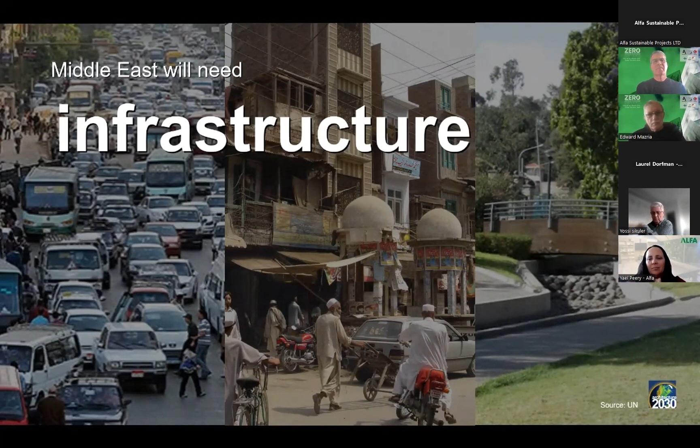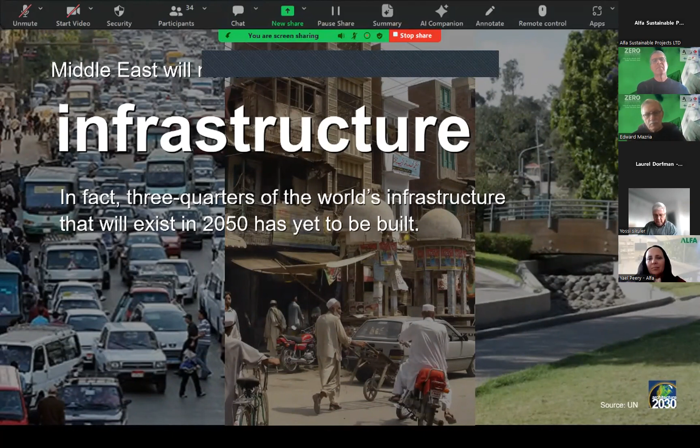The Middle East will need 60 million housing units by 2040. It will need 540,000 hospital beds, 73,000 schools, and it will need the infrastructure that comes with all that building. In fact, 3/4 of the world's infrastructure that will exist in 2050 has yet to be built. We know that the built environment is responsible for over 42% of global CO2 emissions. And just 4 construction materials, cement, iron, steel, and aluminum, are responsible for 15% of total global emissions.

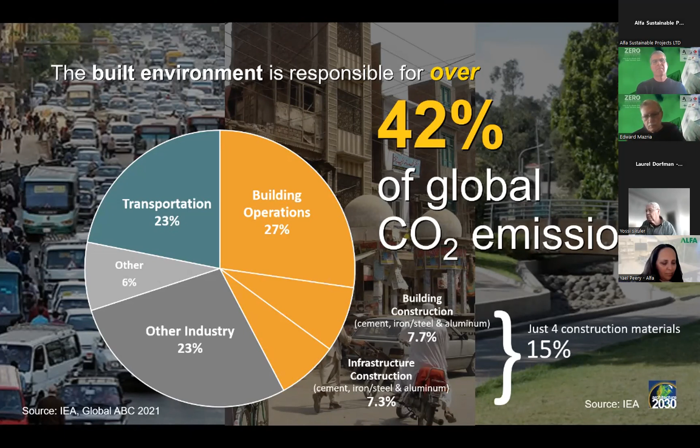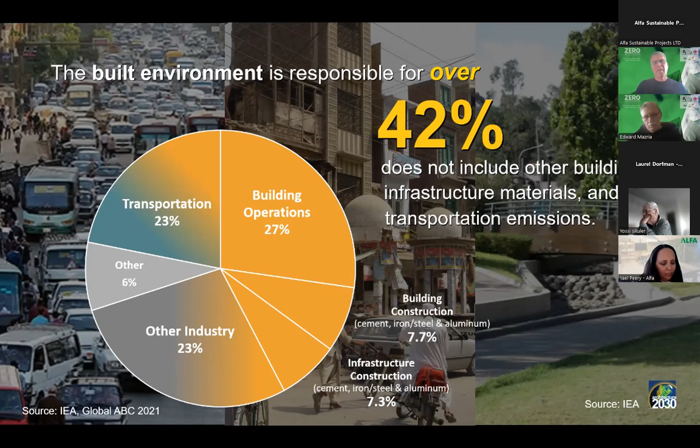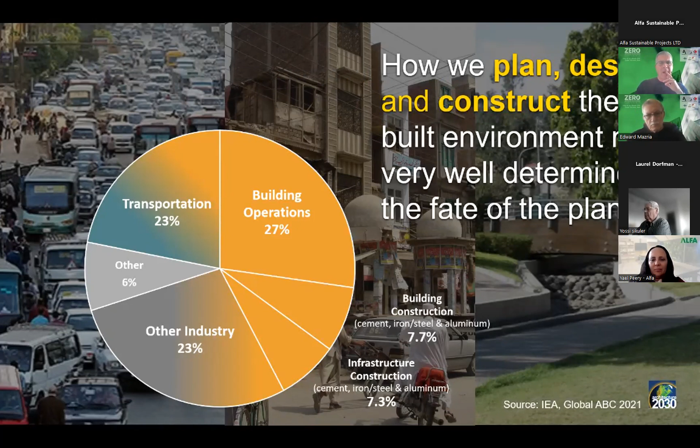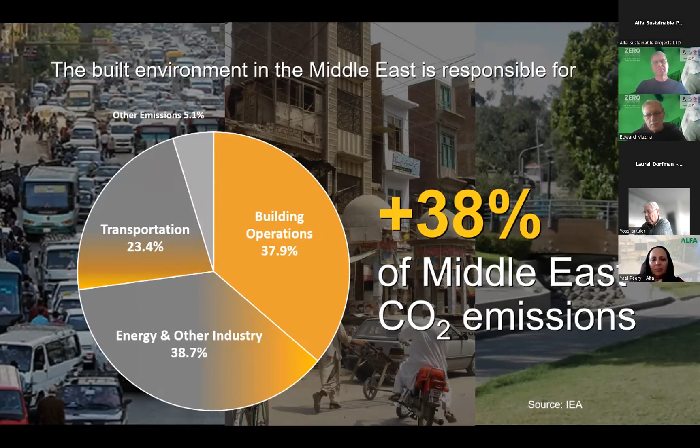And that doesn't include all the other building materials, interior materials, HVAC, infrastructure materials, and the transportation emissions due to planning strategies. When you add all that up, the built environment's responsible for over 50% of total global emissions. So how we plan, design, and construct the built environment may very well determine the fate of the planet. The built environment in the Middle East is responsible for more than 38% of its CO2 emissions. You can see that building operations, just building operations, is about 38%. And then you have building the buildings, all the construction, infrastructure, and transportation emissions due to poor planning.

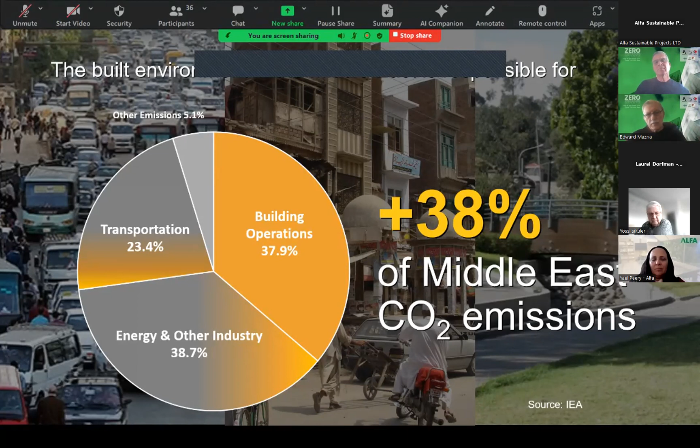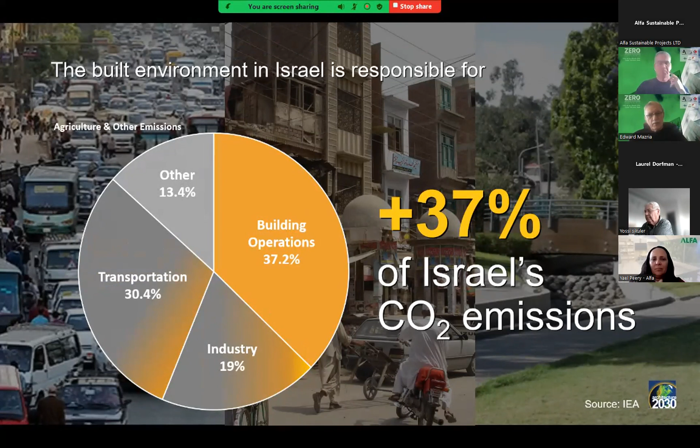In Israel, you see about the same. Building operations at 37%, and then you have a portion of industry and transportation.

In 2015, at COP21 in Paris, the world came together and agreed to work to keep global warming well under 2 degrees C, preferably at 1.5 degrees C. In 2021, at COP26 in Glasgow, we issued the 1.5 degrees C communique.

We called for 50 to 65% building sector CO2 reduction by 2030, and for a good probability of meeting the 1.5 degrees C target, phasing out emissions by 2040. For just a 50-50 probability, we would need to reach zero emissions no later than 2050. To date, 74 major international firms and 29 organizations have signed on to meet the targets of the communique.

Why do we keep hearing about 1.5 degrees C and 2 degrees C? Because the difference between 1.5 and 2 degrees C are 2 very different futures. At 2 degrees C, a half a degree difference has a huge impact. At 2 degrees C, 1.7 billion more people will be exposed to severe heat waves every 5 years.

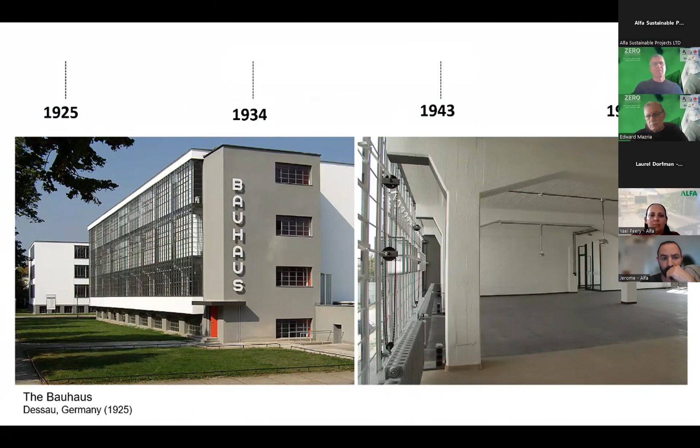So what was going on at that time? The Model T truck was introduced in 1925. Radiovision was invented. There was no television yet. And the first transatlantic call was made in 1927. All of this pretty much primitive by today's standards.

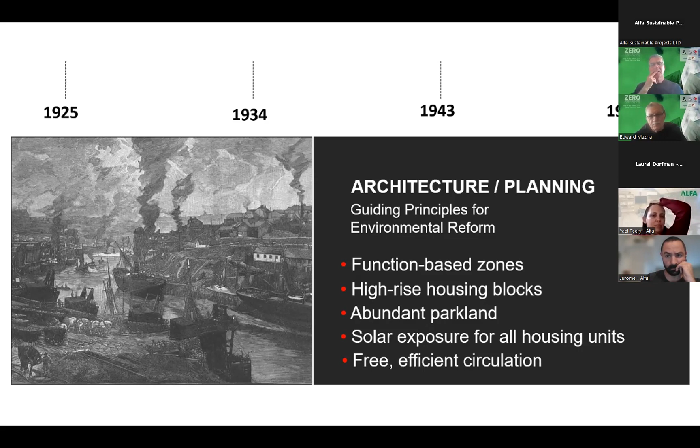In 1928, the International Congress of Modern Architecture was founded, and the first meeting was held by prominent architects and planners in Switzerland. Physical conditions in European cities were so bad at the time that the attendees established a new set of design and planning principles. They called for function-based zones, separate the housing from the polluted industrial areas. They called for high-rise housing blocks with ample sunlight into housing units, parks, and efficient vehicular circulation.

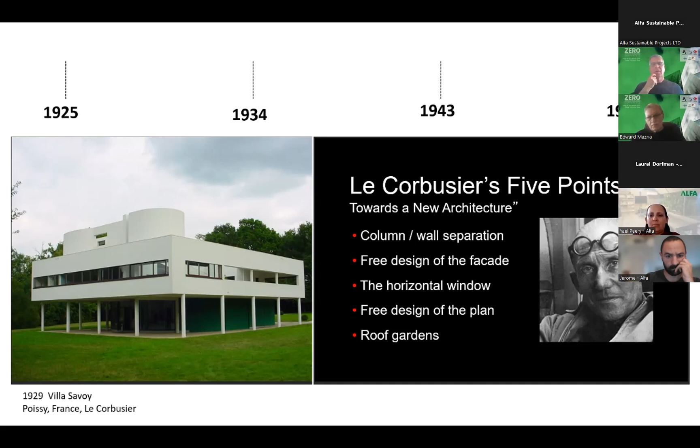Le Corbusier at the time presented the 5 points toward a new architecture. He called for column wall separation, free the design of the facade and plan, horizontal windows for expansive views, and roof gardens atop buildings. By 1932, modernism had become a style and went international. One could build the same building anywhere in the world and condition it with fossil fuels.

For example, in the 30s and 40s, over 4,000 Bauhaus and international style buildings were built in Tel Aviv alone, much less the rest of the world. In 1935, at that same time, we had the first commercial airport opened. In 1949, Philip Johnson designed his all-glass, single-pane glass house in New Canaan, Connecticut, a cold climate with very hot summers. Of course, you can condition any space with inexpensive fossil fuels.

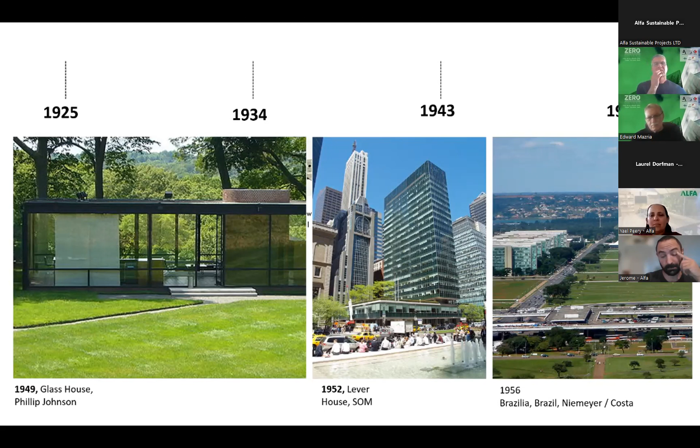In 1952, the beautiful Lever House, glass curtain wall, high-rise building opened. And in 1956, we had Brasilia, the first new town based on the modern planning principles. So, how long did it take to change the world, to go from the Bauhaus to the Lever House? It took just 27 years.

And we did all this with these design tools, a T-square and triangle. We had an ink pen, but you had to dip it in an inkwell. And when you drew a line with a T-square or by the triangle, many times the ink would slip in under the T-square and triangle, and you have to scrape off the ink with a razor blade.

We couldn't design real curves, only maybe a semicircle, because we couldn't dimension it. We only had French curves at that time, and all the calculations were done with a slide rule. In fact, we didn't get the first drawing ink pen until 1960, a rapidograph, and the first laptop computer in 1991.

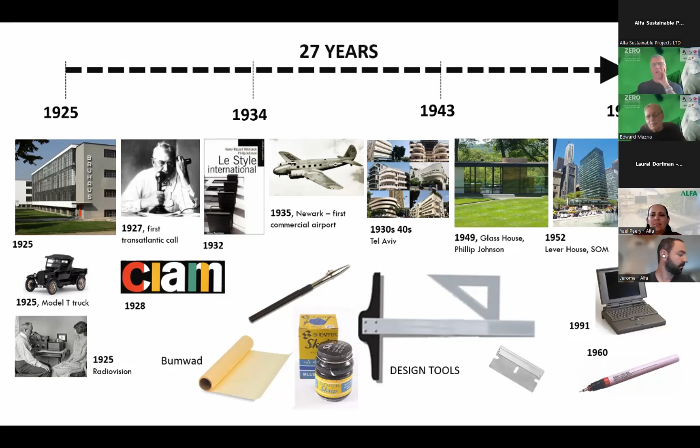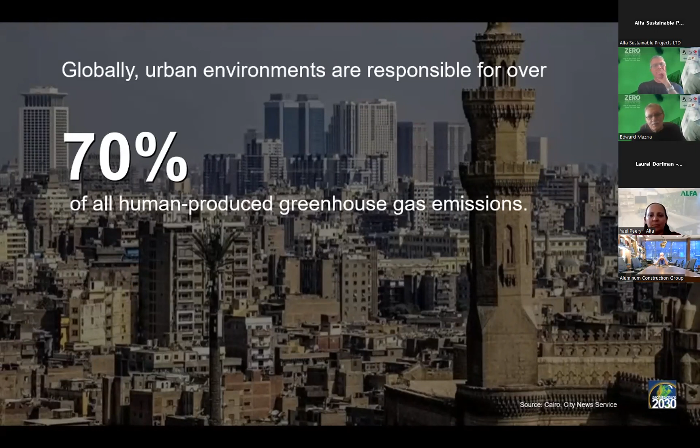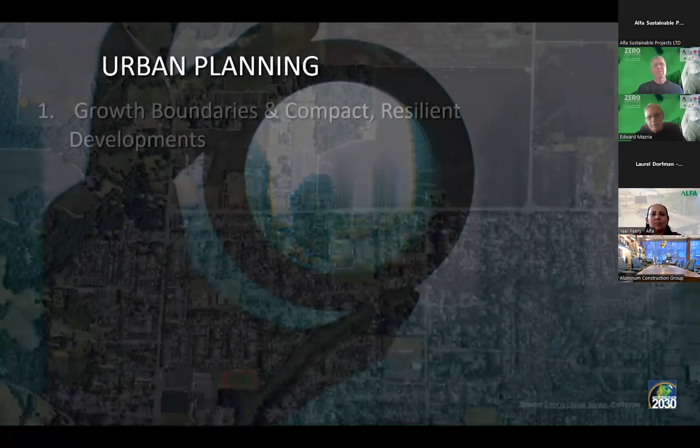Number 1, establish urban boundaries, plan compact and resilient developments that mitigate the impacts of climate change. 2, create and restore natural environments, urban forests, living shorelines, and protect farmland and historic sites, and also create urban parks.

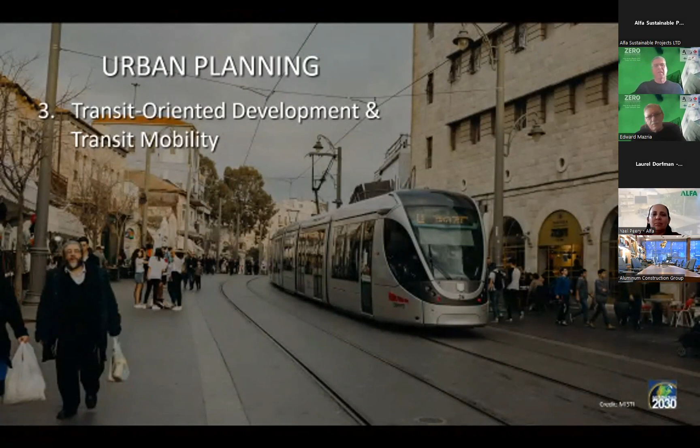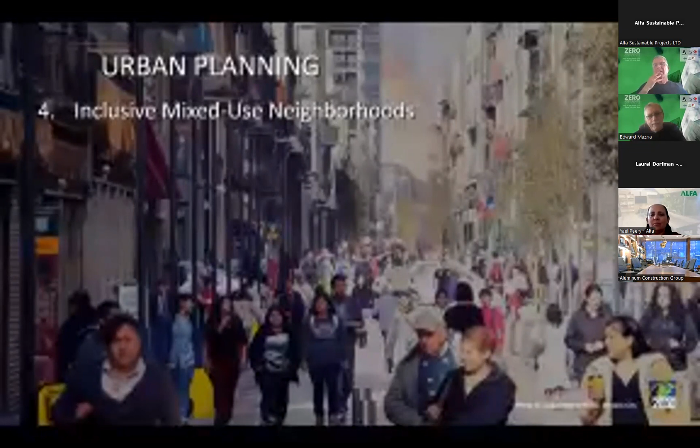3, plan transit-oriented developments that align with density and locate residential, commercial, and recreational areas near transit hubs. 4, create inclusive mixed-use neighborhoods that combine residences, businesses, workplaces, and civic services. And 5, plan for small blocks, human-scale streets, and walking and biking.

So let's review the 5 urban planning principles. Growth boundaries and compact, resilient developments. Natural environments, open lands and parks. Now, the 5 architecture, design, and construction principles.

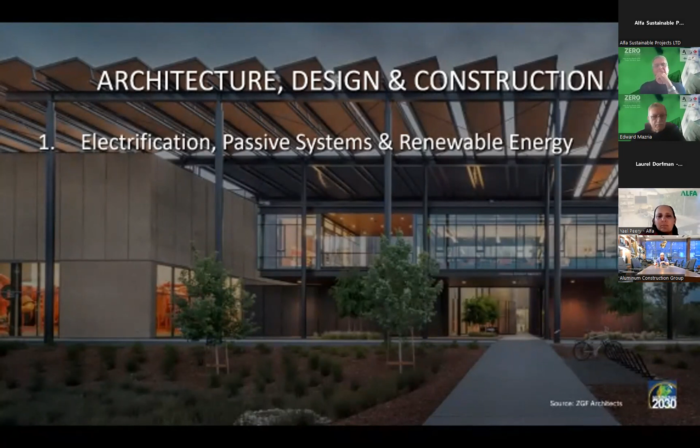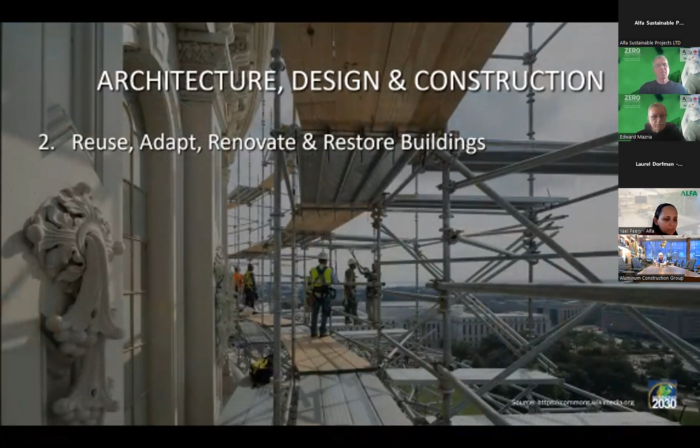1, electrify and incorporate passive solar heating, cooling, daylighting, natural ventilation systems, and integrate on-site and/or off-site renewable energy. Use no on-site fossil fuels to operate buildings. 2, reuse, adapt, renovate, and restore buildings instead of constructing new ones. The old saying goes, well, it's actually a new saying by one of our colleagues, the greenest building is one that is already built.

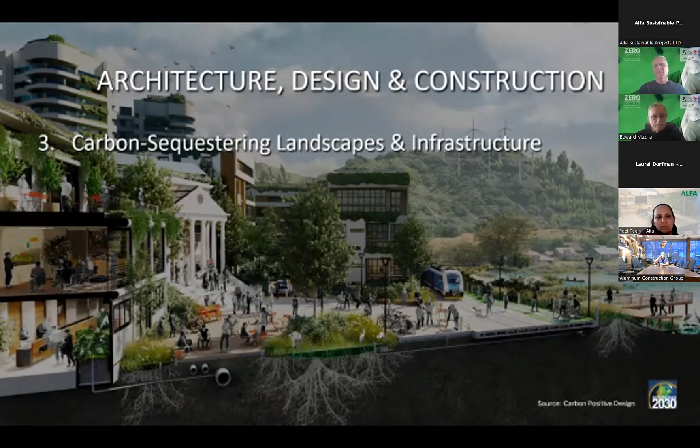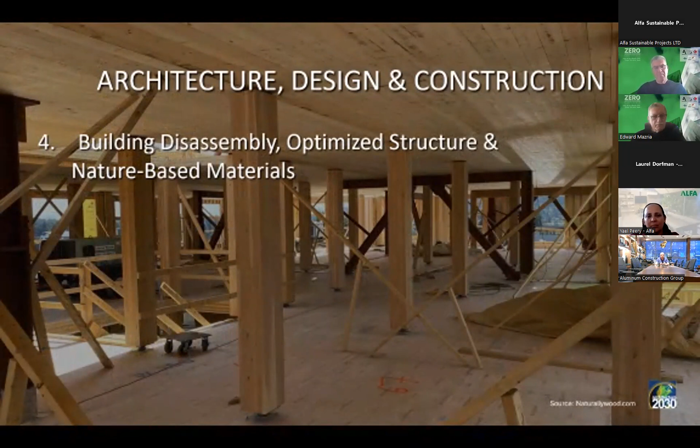3, create carbon sequestering landscapes and infrastructures, pave less and plant more to mitigate the impacts of climate change. 4, design buildings for disassembly so we can reuse most of their materials at the end of life of a building, and optimize structure and use locally sourced, nature-based materials. This reduces built environment carbon. And 5, map present and future climate changes and design to mitigate their impacts.

To review the 5 architecture, design, and construction principles. Electrification, passive systems, and renewable energy. Reuse, adapt, renovate, and restore buildings. Carbon sequestering landscapes and infrastructure, building for disassembly, optimized structure, and nature-based materials. And the fifth, mapping and designing for climate impacts.

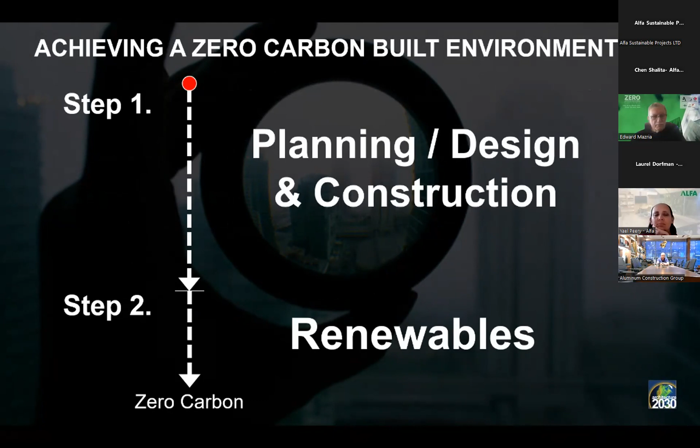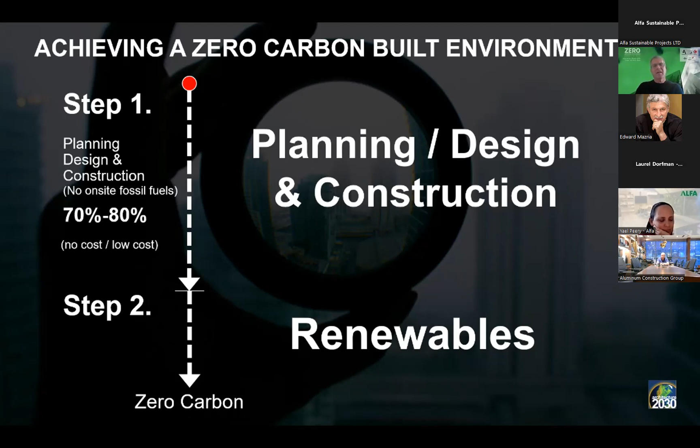So how do we achieve a zero carbon built environment? Well, it's a two-step process. Step one is applying the 10 planning, design, and construction principles and strategies that we've just reviewed. And step two is adding renewable energy. Applying the principles will get us 70 to 80% of the way to zero carbon through no cost, low cost, and cost savings options.

Step two, adding renewables, gets us the other 20 to 30%. This includes building integrated solar and wind electricity generation to community and utility scale solar, wind, and hydro. You can find many of these mitigation and adaptation strategies at 2030palette.org.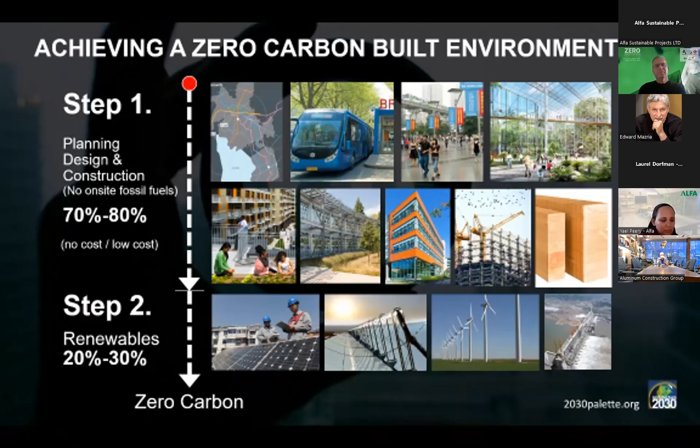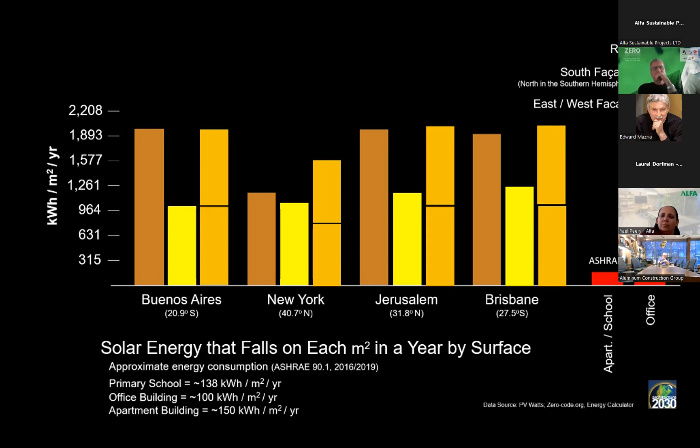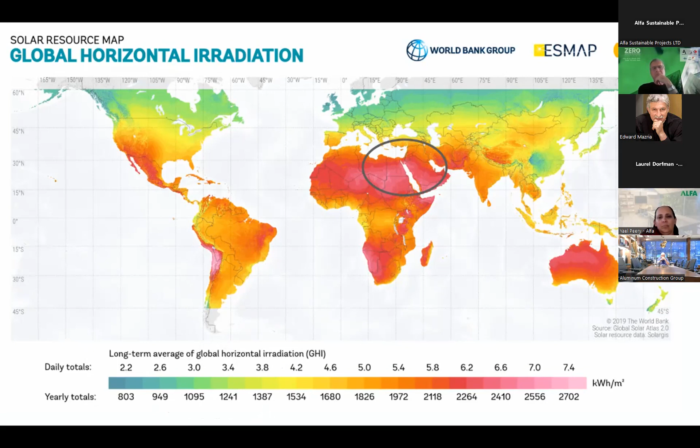Let's look at energy distribution worldwide. You can see that in the global north, you're in the yellow and green-blue range, the low end of the energy spectrum. And if we look at the Middle East and Israel, you're essentially at the high end of the spectrum. So you get about double the amount of energy per square meter in that region than you would if you were in the global north.

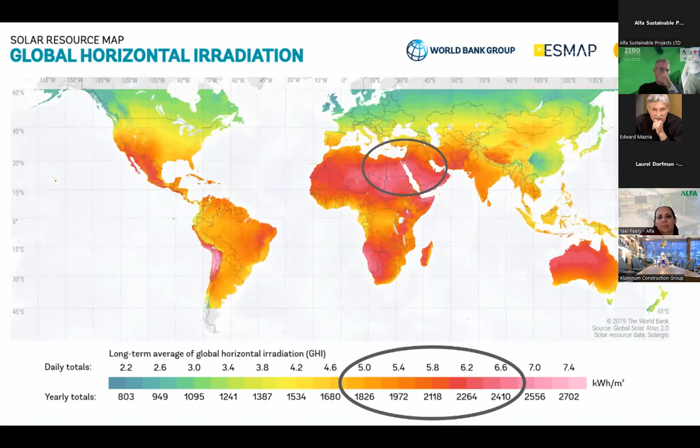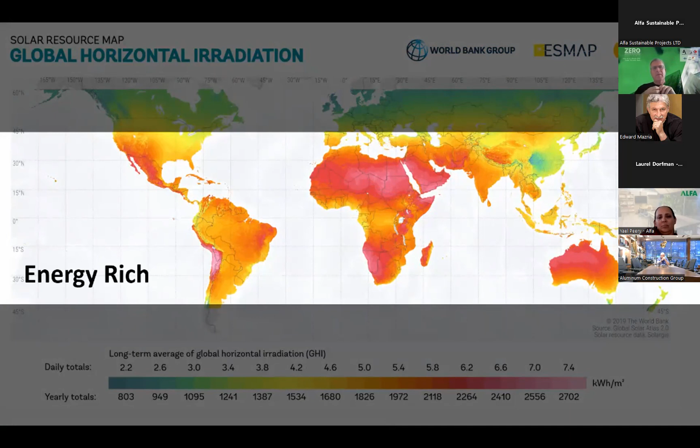So you need about half the amount of collector area that you would need in the global north to collect the same amount of energy. So we could say that the global south is essentially energy rich. In 2020, solar energy became the cheapest way to generate electricity in history.

By 2022, solar, wind, and renewable energy generation had unprecedented growth due to its inexpensive cost, as well as global energy security concerns that were spurred on by the war in Ukraine. In just one year, world renewable energy recorded a 50% growth, with countries pledging to triple their renewable energy capacity by the year 2030. And here you can see that world renewable energy capacity is now growing exponentially.

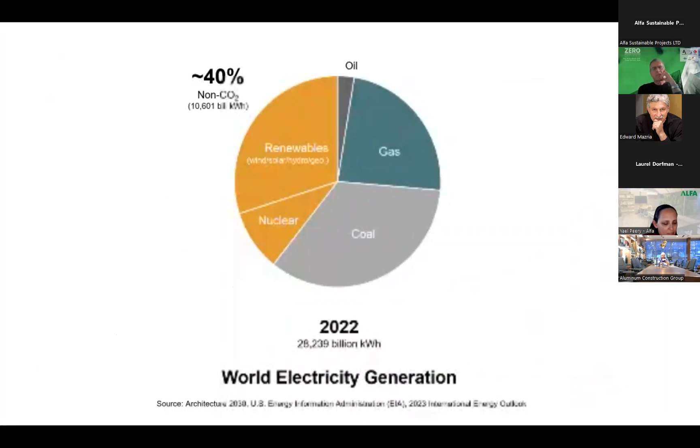In 2022, about 40% of the world's electricity was generated with non-CO2 sources, mostly wind, solar, and hydro. In Israel, however, renewables and non-CO2 emitting sources made up only about 10% of Israel's electricity generation. In 2020, the government issued a target of generating 30% of the country's electricity from renewables by the year 2030. And in 2023, it mandated that all non-residential buildings incorporate rooftop solar.

However, these don't go nearly far enough by international standards and what's required to address the climate crisis that's upon us now. Given its location and economic ability, the country should increase its electricity generation target to 50% by 2030. And its mandate should include all new residential buildings and major residential and commercial renovations.

So, can we meet the 1.5 degrees C carbon budget? The answer is, of course we can. We just need to set about doing it. We have everything we need. Thank you.